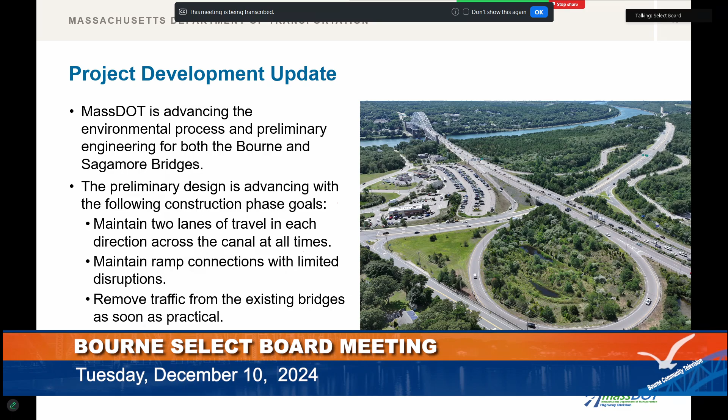And of course, typically there is a moratorium on roadway work on the Cape in the summertime. Our assumption is that moratorium would be lifted for this project, again to minimize the overall construction duration. If we had to shut down over the summer, it would extend the construction duration quite a bit, and we wanted to minimize the amount of time we were here creating a temporary impact.

This figure generally describes the staging for the mainline highway. Here we're thinking about this as either the Bourne or the Sagamore Bridge. On the top right you'll see the existing condition, the existing bridge. The first stage, generally speaking, will be constructing one of the structures. As you remember, we're going with a twin deck configuration, so each direction of travel will be on an independent structure. That really helps here, where we're able to build half or one barrel of the new bridge and then shift all of the traffic over, 2 lanes of travel in each direction, onto that one barrel.

Actually, the temporary condition in this phase leaves a little bit more space than in the existing condition. And for the Sagamore, we will have the shared use path on the first bridge that will be constructed, the first barrel.

Then the existing bridge will be demolished, since we don't need it at that point—all of the traffic will be off of it and on half of the new structure. Once the existing bridge is demolished, that leaves us room to construct the second half of the new bridge barrel, and then we will finally shift traffic back over to the final condition. That's a simplified version, but I think it paints a good picture of what will occur in terms of meeting our overall goal of keeping everything open throughout the entirety of construction.

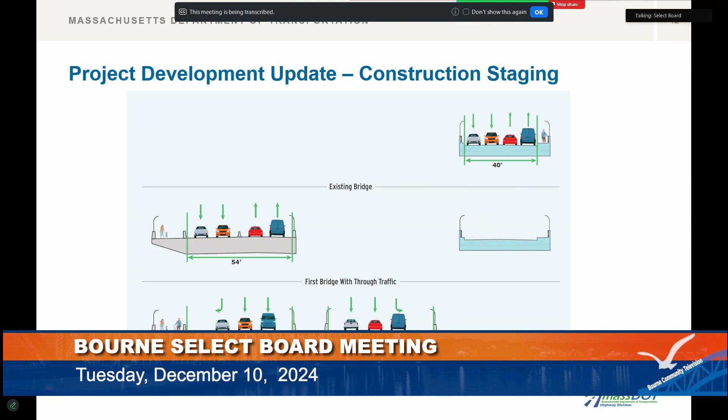So I think that's all I had. At this point, I'm going to turn the mic over to James Barnack from HNTB, and he's going to go through the recommended Bourne interchanges.

Do you want us to hold all questions until the end? No, not at all.

Can you just go back to that slide, the sidewalks, the pedestrian use things? Yes. My recollection is that on the Bourne Bridge configuration, the sidewalk's going to stay on the same side as where it is now, is that right? And that on Sagamore, it's going to totally change to be moved way to the west?

Yeah, on Sagamore we're going to have the shared use path on the inboard side, towards the middle of the canal. That really gives us enough space to be able to get the shared use path down to grade. As you remember, we're trying to connect the shared use path to the Army Corps owned canal service road as a key benefit to the multimodal accommodations we're proposing.

In order to get the shared use path down to the canal service road, we need to navigate a lot of vertical clearance, and we obviously need to do so in a manner that meets all applicable accessibility requirements like the ADA. So we need quite a bit of space to get those shared use path facilities from on the bridge down to grade. Putting it on the inboard side, for instance on Sagamore North, there's a lot of space available to get that shared use path down to grade. If it were on the other side, we'd be looking at more impacts to properties and more challenging grades. That's why we proposed it for the Sagamore Bridge on that side.

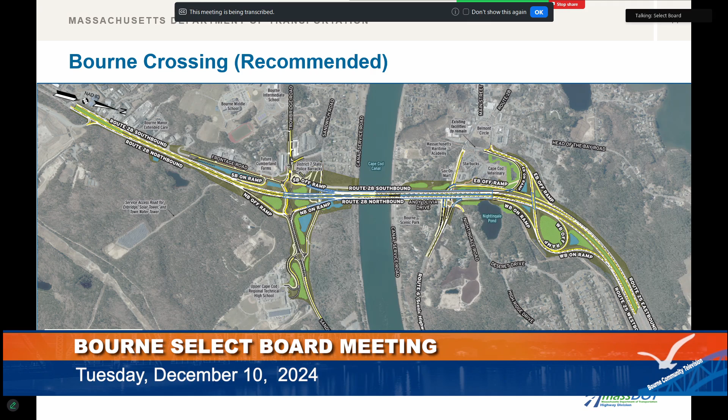In the current condition, if you're coming down 495 and 25 and want to go to Route 6 to the Mid Cape or Outer Cape, most likely you'd cross the bridge, go into the rotary, take Sandwich Road, and then get onto Route 6. We've added 2 direct connect ramps, the eastbound off-ramp and the westbound on-ramp, so traffic can take Scenic Highway to Route 6 and bypass the existing rotary, which should improve operations.

Diving into the Bourne North interchange, the recommended interchange you've seen before maintains the existing trumpet configuration of the ramps. We're calling these the direct connect ramps because we've added a new eastbound off-ramp, and a new westbound on-ramp that connects Scenic Highway to Route 25. In addition, we've added a single-lane roundabout at Andy Olivia Drive and Nightingale Road.

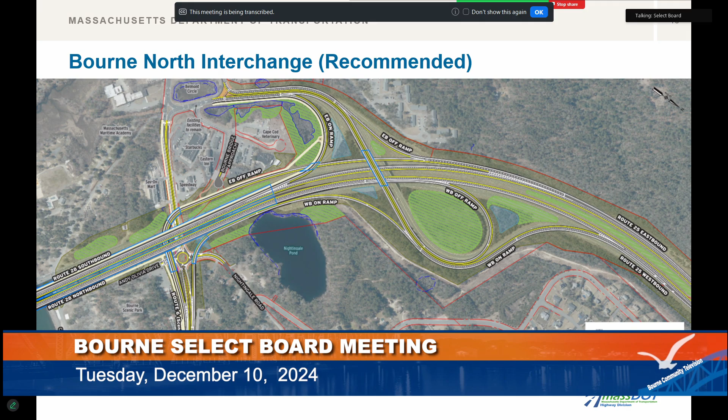We've also improved bicycle and pedestrian accommodations throughout Bourne North, with desired connections to Belmont Circle along Scenic Highway, to the Canal Service Road, and also along Scenic Highway, which are great improvements to the area. Zooming in to the west of the mainline along Scenic Highway, we've narrowed it to 1 lane in each direction, which allows us to improve multimodal accommodations to Belmont Circle and Bourne Scenic Park. We're allowed to do this because of the direct connect ramps, which reduce traffic volumes within Belmont Circle by 37%, and also allow Belmont Circle to largely remain in its current configuration.

Can I ask a question? When you say you're bringing it down to a single lane, are you talking about from the single lane roundabout to Belmont Circle? That's correct. I think that's a great question. To clarify, there are 2 lanes right now in each direction. Because of the direct connect ramps, which really separate regional and local traffic, we're able to reduce Scenic Highway to 1 lane in each direction, and we're proposing a shared use path on the south side and a sidewalk on the north side.

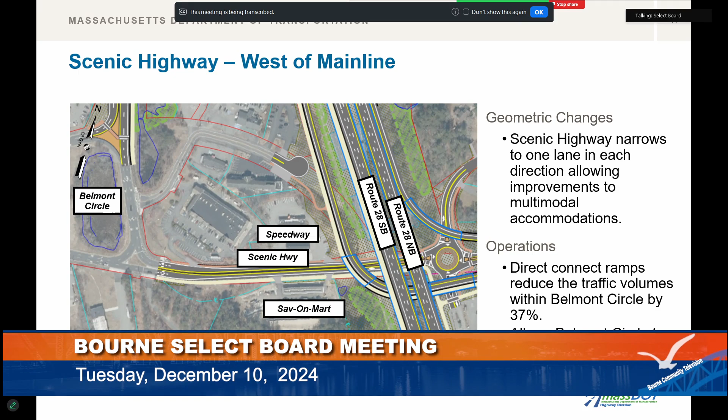East of the main line along Scenic Highway, you can see the single lane roundabout I mentioned, which improves operations and safety. It also creates a gateway into Belmont Circle. The speeds along Scenic Highway east of here are relatively high, and we wanted to create a safe space for the community.

As drivers come into Belmont Circle, they'll enter the roundabout at a slower speed. The direct connect ramps reduce traffic volumes at the Nightingale intersection by 50%, and improve access to and from the Nightingale neighborhood and Bourne Scenic Park. This is something we've heard from the community — residents on Nightingale Road have a hard time accessing Scenic Highway because of so much volume. Now they'll be able to do that, and same with the campers entering Bourne Scenic Park.

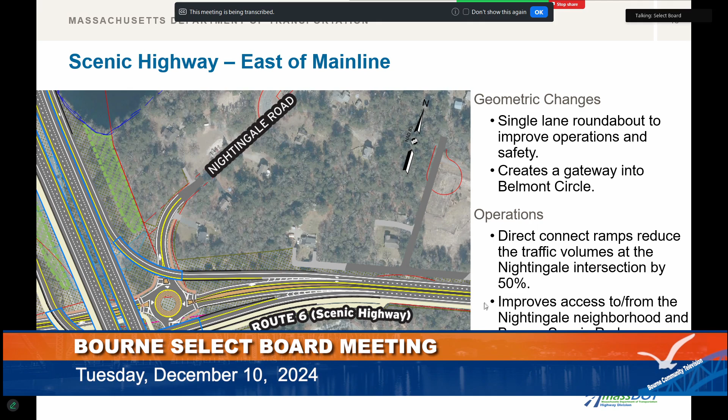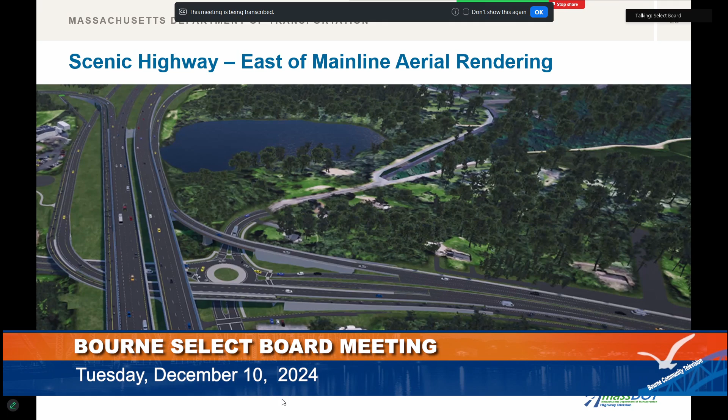Question — yep. There's this roundabout. If people are coming out of Bourne Scenic Park with those big motorhomes and they try to go around that roundabout and then get onto the road, I'm sure you put templates in place to check, but I'm curious if it'll be big enough for them to make the turn all the way around.

Yeah, it's a great question. All of our designs accommodated WB 67, the largest tractor trailer, so it will accommodate the campers. Actually, the roundabout with the turning radius for them entering and exiting Bourne Scenic Park will be improved because we've improved the sight lines.

Okay. So I'm sorry, before we go to Sally — I think we should pause before we get too much information overload. I think it's good to ask questions one at a time. Certainly, I think it might make sense. Did you have a question, Marlene?

I just want to note that this hammerhead from Nightingale Pond Road is something the board needs to talk about taking. Yeah, so it would be constructed as part of the project, but it wouldn't necessarily stay a state highway layout, so that's something we should be prepared to talk about taking as a public way. Is Nightingale public or private? State-owned, I think — at some point the state built it as part of the project. Nightingale's public, right? Isn't it? I don't know, let me check. I think some of the others, like Deseret, are private, but Nightingale itself — I'm not sure, let me check. Yeah, that's fine.

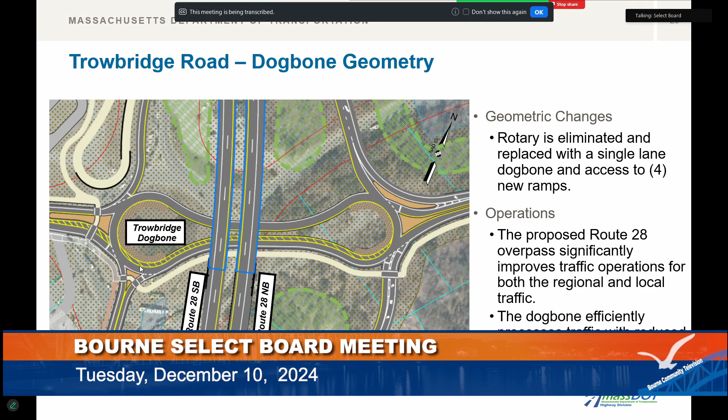Zooming into the dog bone, the rotary is eliminated and it's replaced with a single lane dog bone, which provides access to the four new ramps I previously discussed. The proposed overpass significantly improves operations, again with that theme of separating regional and local traffic. And the efficiency of the dog bone processes traffic and reduces queues so that they do not extend onto the main line.

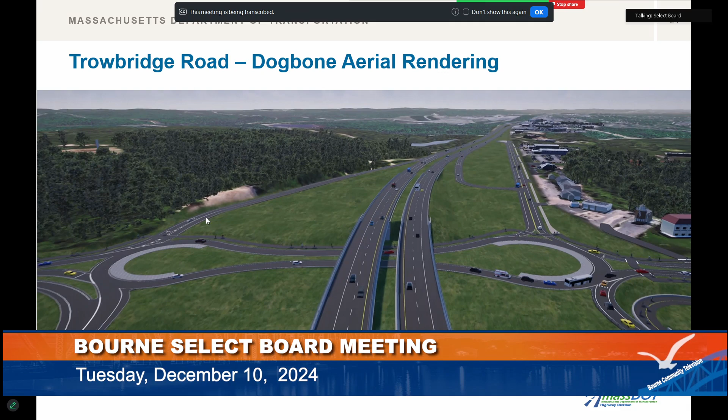This is a rendering of the dog bone. So here you're looking south down 28, Falmouth is way down in the distance. You can see the dog bone here, and the four ramps: this is the southbound off-ramp, this is the frontage road, and you can see the southbound on-ramp here. This is the northbound off-ramp, and then right here is the northbound on-ramp if you were going to go over the canal.

Looking at the improvements to Trowbridge Road at Veterans Way, we've reduced the intersection width and made it right-in, right-out to eliminate wrong-way crashes. We've also reduced the crosswalk length by 50%, making it safer for pedestrians and bikes.

Currently Veterans Way is used as a cut-through. People coming off the bridge enter the rotary, and instead of going left to reach Sandwich eastbound, they take a right, go up Veterans, take Sandwich lower, then go eastbound. Now, because of the eastbound off-ramp on Bourne North and what we've done at the dog bone, people wanting Sandwich eastbound will enter the dog bone and go left instead, which should reduce congestion and make this a less desirable, lower-volume route.

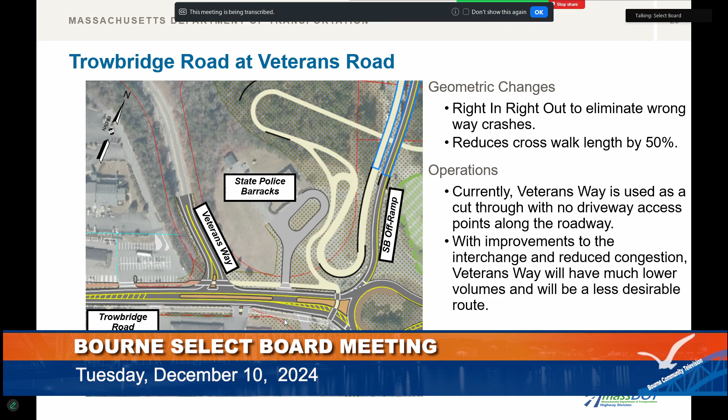We've also coordinated with the town and the state police barracks to provide them 360-degree access. Currently they have three egresses to the property. Because of the new configuration, we're reducing this to one driveway, but we're making an open cut in the median. So they have access at the dog bone where they can reach all four ramps, going north and south, and they can go east-west along Trowbridge—really providing them 360-degree access.

So, Sandwich Road at Upper Cape Technical School—before getting into the slide, this is something we heard strongly from the community. It was really a safety issue with the existing configuration, and we did a lot of work realigning Trowbridge and Sandwich Upper to make this work.

The grades were challenging, but we're providing a roundabout here. With the realigned driveway for Sandwich Road, it improves sightlines in all directions, and the new interchange configuration will reduce congestion and the number of vehicles using Upper Sandwich. The roundabout provides operational and safety benefits and eliminates the need for police in the afternoon when teachers and students exit the school. Everything in beige is a shared use path, so we're providing an ADA shared use path up to the school so students can walk or bike and then access either the bridge or the canal.

This is a really good rendering showing the sightline and highway geometry improvements we made. There's that existing hill—we cut some of it out, so now you can see a straight sightline instead of curving around. You can see the dog bone here.

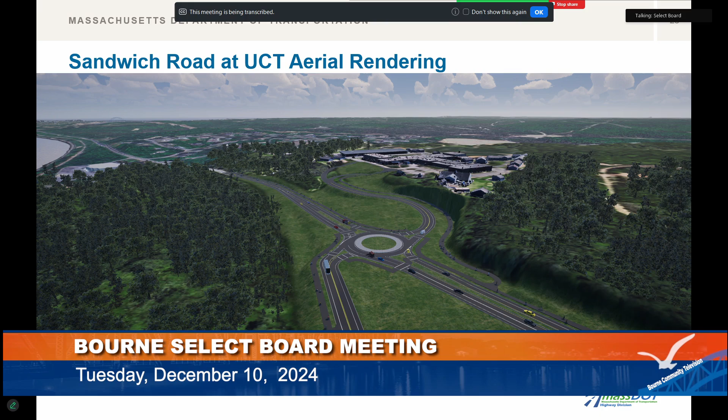Before I turn it over to Jill, are there any questions? Can we go back one or two slides?

What I'd like to see is the frontage road—I don't know if you had a rendering of it. My thing is, if you go from the dog bone and come out by Cumberland Farms, go by the funeral home, Jeff Battles, the dealerships, and then a little further there's a car wash presently there. A couple of things: have you spoken to the business owners along these spurs? Because it may be easier to get in and out, but at the same time you may be hurting people's businesses along the way, since you're taking away direct access off MacArthur Boulevard, which is what they presently have.

From the project team's perspective, I don't think we've met directly with any of the property owners there. I can't speak to whether District 5 has had open discussions with those business owners based on state highway access issues. But the frontage road is a key component of our recommended interchange, and it was also a component of the other interchange we investigated on Bourne South, the single point urban interchange.

The frontage road was consistent among both those options, and the reason why the frontage road is so important is because it allows us to take those business accesses off the main line of the highway. In this case, the southbound on-ramp is in the same vicinity as the frontage road, and that's blocking access from the businesses to the main line. We can't have the businesses have curb cuts into the southbound on-ramp.

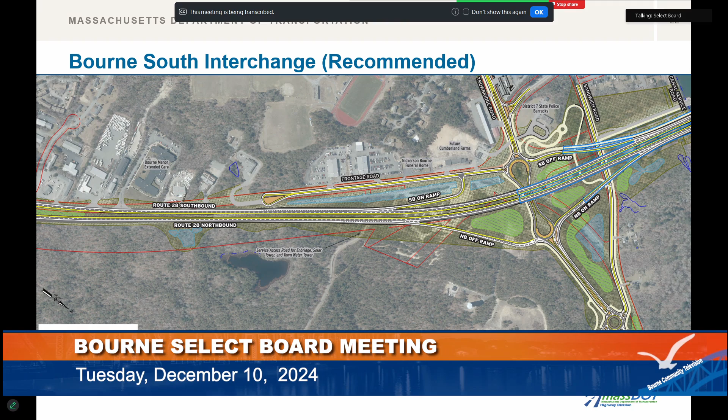So the frontage road is a really key component to allow the southbound on-ramp to access into the main line here. I understand it from a safety perspective, but I'm just wondering...

...if you're going to be eliminating the business's chance of making the most amount of money out of it, and you're hurting them, is there any way the state can reimburse them for any lost revenue? Because right now they're on a thoroughfare, going down MacArthur Boulevard, so that gives you the most exposure for your businesses. So if you're eliminating that, I wonder if there's a way of helping reimburse the businesses for the possible lost revenue in the future. It may end up pushing Cumberland Farms out of that site altogether if they can't maximize that property to the fullest extent.

Based off of our right-of-way or property requirements, MassDOT does not have the ability to reimburse any sort of lost revenue. Unfortunately, we don't have the ability to do that. But I think that if we need to have more specific outreach with those business owners, we're happy to do so. We could coordinate with the town on that. Definitely, those would probably be worthwhile discussions.

But in terms of access to the main line, we do have the southbound on-ramp connected to the frontage road. It's conjecture at that point, so I won't make any guesses, but the southbound on-ramp is right there, and it is a component of the frontage road for a short distance. So I think the hope is that it wouldn't detract too much from business traffic or traffic going by the businesses, because it is not much of a detour.

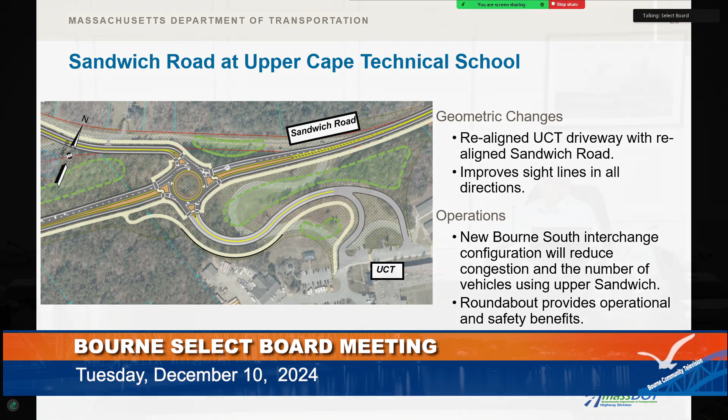Agree, a couple things I like about this. I like the dog bone design, because one of the things you see now in the afternoon, like at 3 o'clock, there's no place for people to go. The rotary just gets completely jammed because there's not enough space for people to line up, and there's too many lanes. There are things that are good about the new rotary, but if you try to go through there at 3 o'clock, forget it, it's total gridlock. Or if there's a disabled vehicle, like tonight, this would have helped. It was jammed in all directions. The dog bone helps that stacking, and the single lane rotaries mean you get in the rotary and you're not competing with people trying to change lanes. So I do like that.

I like the Upper Cape thing. On my wish list, I'd like to see us somehow connect to Gallo Arena, because that's another area that's close there. It seems like it's far, but it's so integral to that whole intersection and how people live and recreate. I think there might be some ways to do it. There's an old bike path that's kind of a dirt road, so I feel slightly better about the frontage road where it is, but I am really worried about the gateway aspect of that highway traffic coming into this really commercial area. Buzzards Bay and MacArthur Boulevard are the commercial areas of Bourne, so the regional people have to know they're still in the local traffic zone.

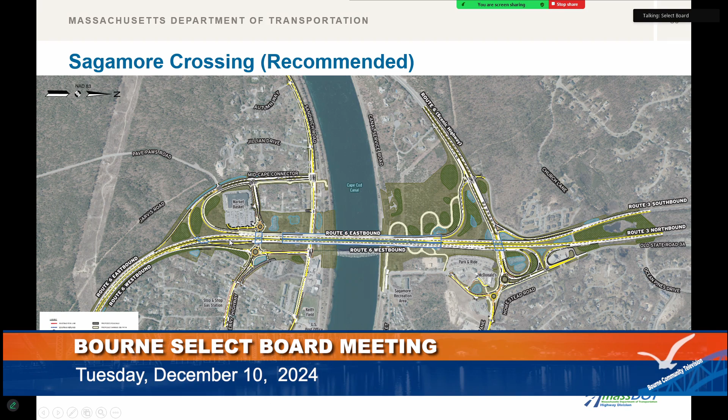So first we're going to start off by looking at the northern interchange alternative. The biggest difference with the recommended design over the existing condition for the northern interchange is the location of the Route 6 westbound off-ramp that heads to points east on Scenic Highway. The off-ramp today is located over by the Park and Ride, and what we're seeing as we evaluate traffic, especially along Scenic Highway, is that traffic coming off that ramp turning left onto State Road is resulting in a lot of congestion in this area because they have to come off the ramp and head over a couple of lanes to make that left turn. So with this alternative, we're relocating that Route 6 westbound off-ramp over by the loop ramp, so that traffic now comes directly to State Road, and anyone heading north on State Road from there would just turn left at a signalized intersection.

We'll still have a segment to allow traffic to come back to the Canal Street, Meetinghouse Lane, Scenic Highway intersection to head east as well. But this really helps eliminate the congestion that we were seeing on the Scenic Highway area.

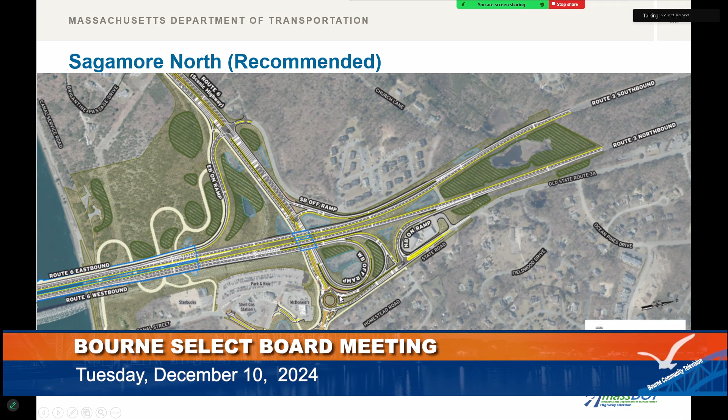Where that ramp comes off is going to be a signalized intersection, because it's very close to the northbound on-ramp. So that's a major intersection with left turn and right turn options. I do have a graphic later that shows it a little bit closer to help people see it better.

Next we're going to take a look at the different major intersection controls throughout the northern interchange. I'm going to start at the Scenic Highway Route 6 eastbound Church Lane intersection, then move east along Scenic Highway and jump up to the State Road intersection.

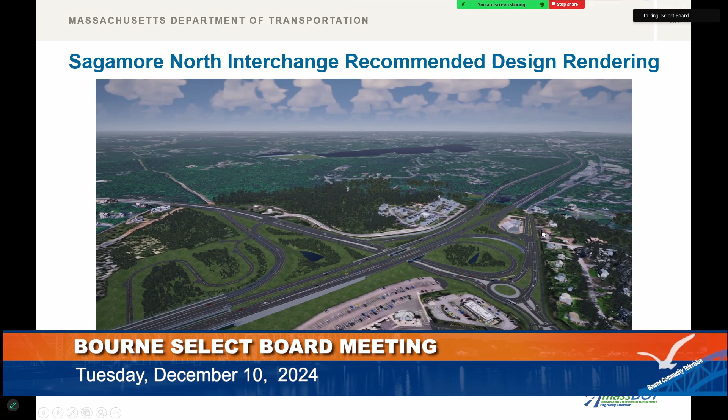This first graphic here is the Scenic Highway Route 6 eastbound on-ramp and Church Lane intersection. There are two big differences with this design over the existing condition. One is that we're adding a second left turn lane to improve storage for left turning vehicles heading onto the Route 6 eastbound on-ramp to go up and over the canal on Cape.

The other change is the extension of the third Route 6 westbound lane. This is really just to help give the heavier vehicles more time to get up to speed before they're merging in with that second lane.

This is another area where we're seeing some congestion, especially if heavier vehicles are coming from a stop condition at the signalized intersection. For operations, we're seeing that delays with these improvements are similar or lower than the existing condition, and we're anticipating shorter queues. The addition of that second left turn lane for Scenic Highway westbound helps contain all of the storage for left turning vehicles within that area.

Now we're going to slide over to the Route 3 southbound off-ramp intersection with Scenic Highway. At this intersection, the difference is the addition of a second lane on Scenic Highway in both the eastbound and westbound directions.

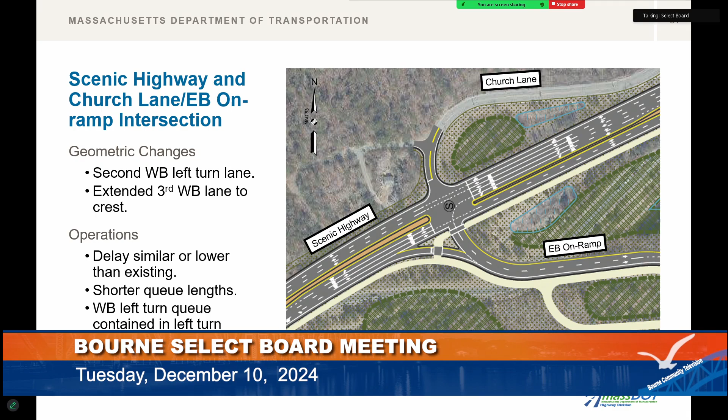Okay, so the next intersection is the State Road Scenic Highway. So right now, when you're coming down Route 3, it goes down to one lane, so those two lanes merge onto the bridge. But you're going to have two lanes coming down Route 3, and then one lane, like a merge lane, on the bridge. Correct. So that'll help relieve some of that southbound traffic, right? Yes, correct. Thank you.

Okay, so the next intersection is the State Road Scenic Highway Canal Street Meetinghouse Lane intersection. So currently today this is a signalized intersection. This is the one that's over by the McDonald's, Dunkin' Donuts, and also Canal Street is where you access the park and ride.

So what we're proposing is to split this up into two separate intersections, and right now we're showing the two roundabouts for this location. Generally they will be single lane roundabouts in all directions, except that we will have the Scenic Highway to State Road northbound segment be a 2-lane portion.

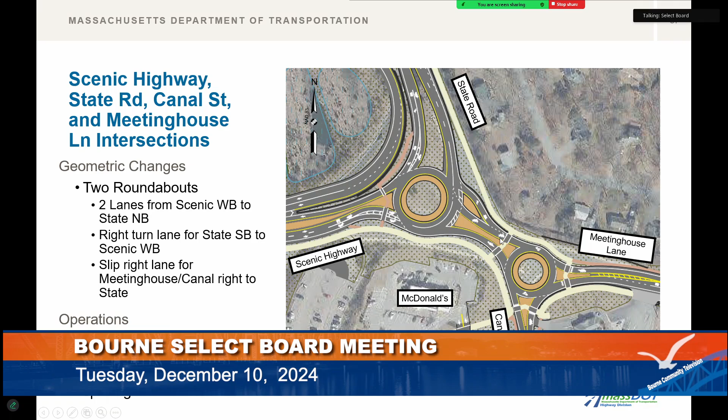So just to respond to John's question, we had talked at the open house at length about this, and we'd heard from other residents about interest in the potential extension of the shared use path along State Road. The current design ends it at Homestead, but we are actively looking into what it would mean to continue it to Fieldwood Drive, or north to Ocean Pines Drive, to try to pick up more population for the people living in the area. So that's something we're currently investigating.

Another addition is providing a bike box or accommodations for a bike to cross at the signalized intersection and get into that shared use path. So if they're concerned about traveling down to the roundabout and getting into the shared use path there, they'll have the option to cross at this location as well.

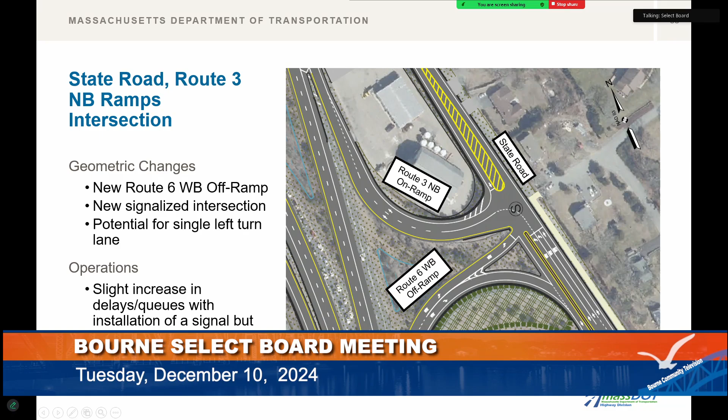Extending the shared use path down to Ocean Pines Drive would be a huge benefit, because if you can get down to Ocean Pines Drive and make the right, then go up through Ocean Pines Drive all the way, you're on Old Plymouth Road, almost into the heart of Sagamore Beach. So I think it'd be a huge benefit for that little bit more work in that area.

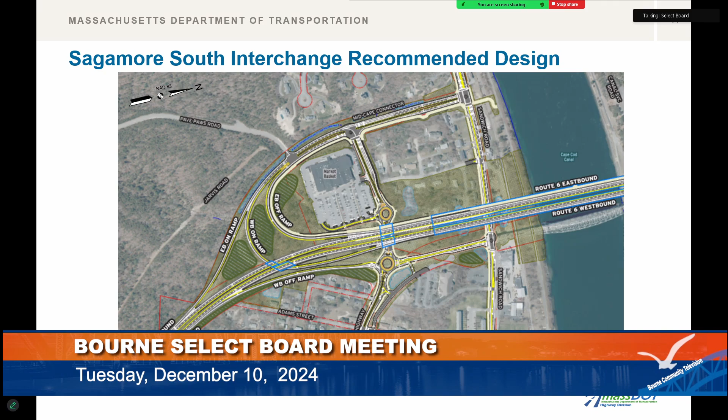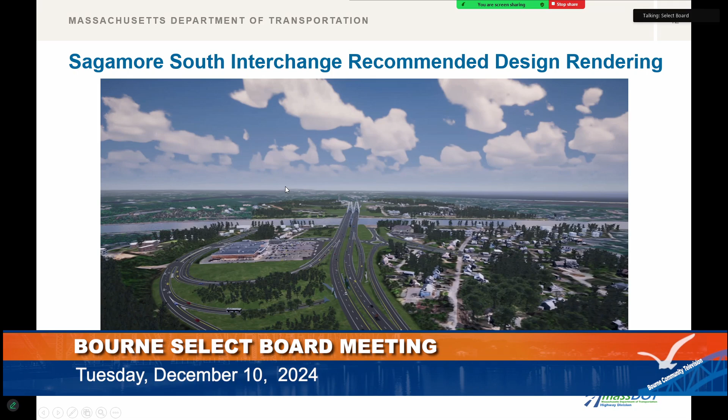Okay, similar to the north, I am going to run through the different interchanges really quick to show the differences between the existing and recommended design. We're going to start on Sandwich Road, run east hitting the major intersection points, and then jump up to the Factory Outlet Way and Cranberry Highway corridor.

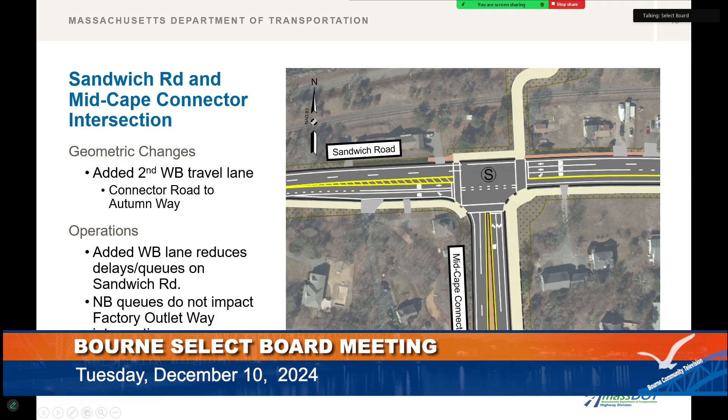This is the Sandwich Road and Mid-Cape Connector intersection. What we're doing along Sandwich Road, from just west of Adams Street all the way through to Autumn Way, is adding a second westbound lane. That's the big change at this intersection. With the added westbound lane, we see a reduction in delays and queues on Sandwich Road, and we've confirmed that traffic coming down Mid-Cape Connector to the intersection isn't going to back up or impact traffic at the Factory Outlet Way intersection.

Now we're sliding over to the east along Sandwich Road, and we're at the new Sandwich Connector Road and Sandwich Road intersection. The Sandwich Connector Road is actually going to occupy the same place as Route 6 does today. The difference is instead of going up and over Sandwich Road, it's going to dive down and meet at grade with Sandwich Road at this new intersection.

Again, we're still carrying that second lane along Sandwich Road westbound to help with processing traffic. For the connector road approach, we're going to have a single lane coming from Cranberry Highway, and as we come into this intersection, that lane splits for left and right turning traffic. Currently we're showing a double left turn lane, but this might be an area where we see a change in the future—it's looking like we just need a single left turn lane here, so that may be a change coming soon.

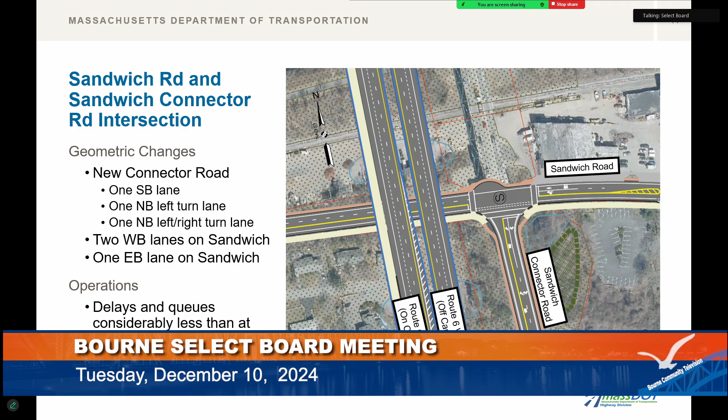For operations, we're seeing delays and queues are considerably less than what they are at the Mid-Cape Connector intersection, which operates within acceptable limits. So this intersection is also operating within acceptable limits.

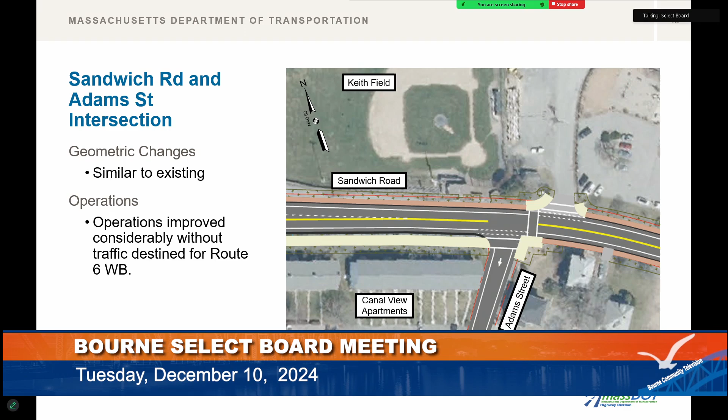Okay, and the last intersection on Sandwich Road is the Adams Street intersection. At this point, we're generally back to the existing cross-section where we have one lane in each direction. In terms of operations, we are seeing improvements because of the relocation of that Route 6 westbound on-ramp to come off of Mid-Cape Connector.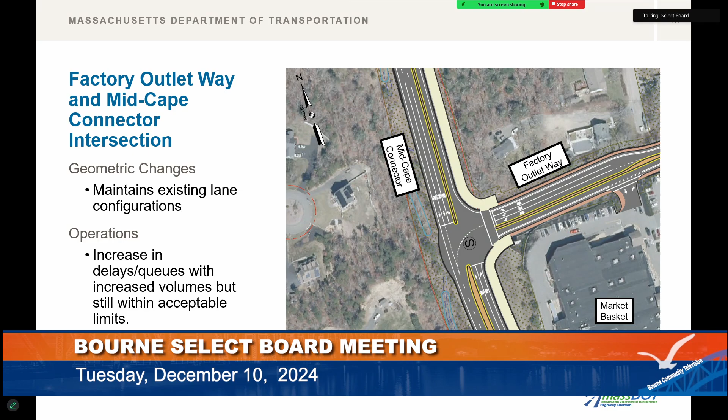Now we're jumping up to the Factory Outlet Way and Cranberry Highway corridor. This is the Factory Outlet Way and Mid-Cape Connector intersection. We're not seeing any changes here, this is going to be similar to the existing condition. We are seeing an increase in delays and queues at this intersection because of the increase in volumes with now connecting Cranberry Highway to Factory Outlet Way, but it is still operating within acceptable limits.

Now we're sliding over to the east, or right a little bit, and looking at the two driveways for Market Basket. The driveway on the left is going to be designed as a right-in, right-out driveway, because of the installation of the median along Factory Outlet Way. Over on the right, we're proposing a roundabout for that second driveway. The roundabout's going to be a single-lane roundabout, and all the approaches are also going to be single-lane. For operations, we're seeing that all approaches have acceptable delays and operate under capacity.

Another thing we look at is the queues when we have two roundabouts close to each other. The next slide we're going to see is just on the other side of Route 6, the Route 6 westbound off-ramp intersection with Cranberry Highway, where we have another roundabout. These two are in close proximity, but we are seeing with the traffic modeling that any delays at this roundabout do not back up into the next roundabout.

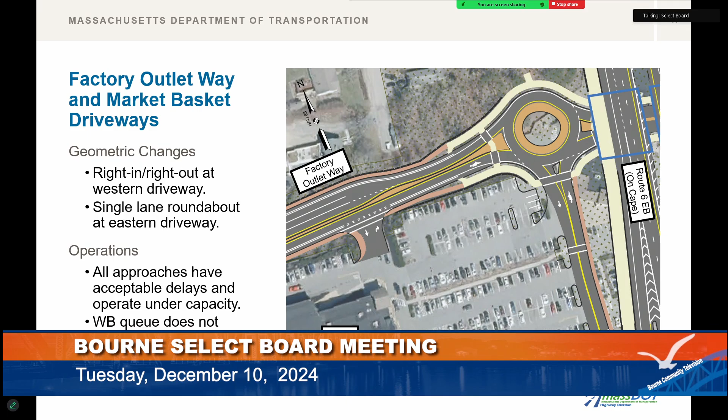Right now, Market Basket, when you go in, that's considered a driveway, so Market Basket has to plow it and sand it and everything else. Post-construction, is this now going to become a MassDOT maintained road? Yes, correct.

So this is the Route 6 westbound off-ramp, Cranberry Highway, and Sandwich Connector Road intersection. Here again, we're proposing a single-lane roundabout, and we do have a slip right turn lane for traffic coming off of the Route 6 westbound off-ramp. In terms of operations, we are seeing that for eastbound traffic along Cranberry Highway, and so that's left to right on the screen, and for the Route 6 westbound off-ramp traffic, they're operating with minimal delays.

For the Cranberry Highway westbound traffic, so that's right to left on the screen, we are seeing slightly higher delays and queues for that traffic, but it's still operating under capacity.

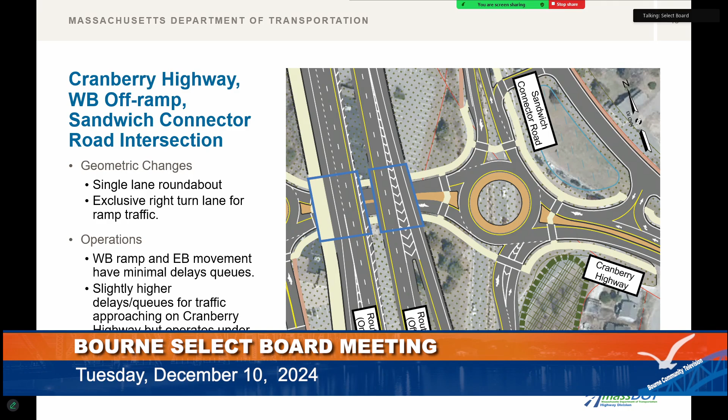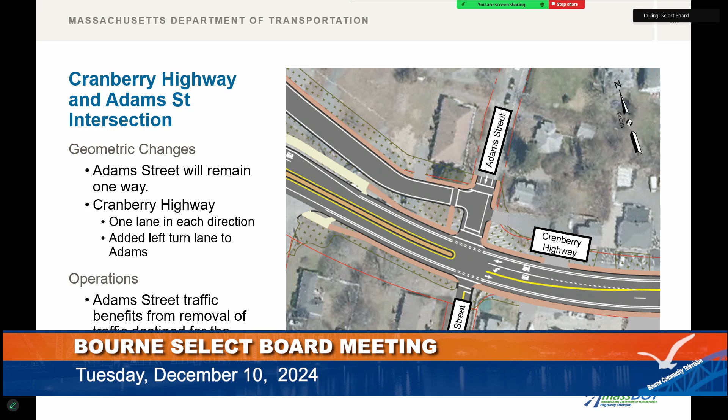Okay, and last we have the Cranberry Highway and Adams Street intersection. At this intersection, we're maintaining the one-way flow on Adams Street and a single lane coming out of Adams Street. Cranberry Highway will be one lane in each direction, and we're adding a left turn lane for traffic from Cranberry Highway turning left onto the southern portion of Adams Street. Similar to what we saw at the Adams Street and Sandwich Road intersection, we're seeing a reduction in delays and queues because of the relocation of the Route 6 westbound on-ramp at this location as well.

And then this is just another rendering showing that design. So we're south looking north. This is the Market Basket roundabout. This is the new Route 6 westbound off-ramp, Cranberry Highway and Sandwich Connector Road intersection.

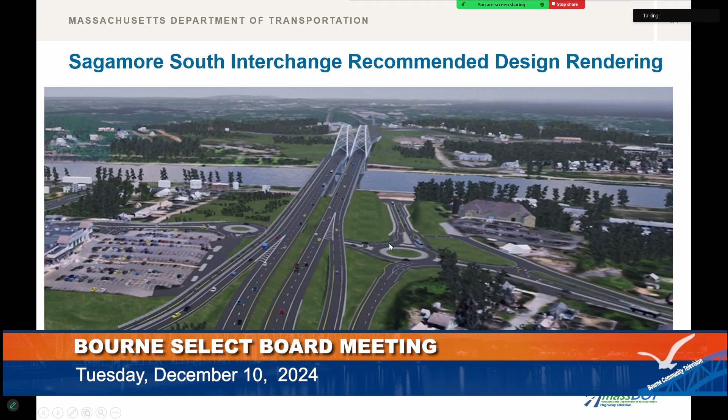For informational purposes only, are you aware that over by the Cranberry Highway, right with the Christmas tree shop and all the property below it, there's a proposed 40B for 3 buildings that are roughly 160 units? Yes, and we are coordinating with them. We've received, MassDOT's received information, I believe, from the town and also the property owners for that of what their future designs may be, and we'll be coordinating with them, especially as it relates to their driveways and how they work with what we're proposing for Cranberry Highway and Sandwich Road.

Thank you. Okay, anybody else? Do you have something you want to say before we do questions? Oh, no, I was just going to jump in if there was any additional discussion on the Turtle Rock property. That's all. Any questions on South Sagamore?

I think it looks good. I like the connection. I think it's going to help in the neighborhoods, which get really backed up now over there. They have real traffic congestion, so it'll help.

If it's not going to be in a future slide, have you identified how many residential or commercial properties will be taken for these projects? Yeah, we're in the process of identifying all of the right-of-way needs for the project. In the environmental notification form from May of 2023, we noted what we think the right-of-way takings would be, with the current preliminary design we have. So that's the best number we have, is what's noted in that ENF, and that's available on our website.